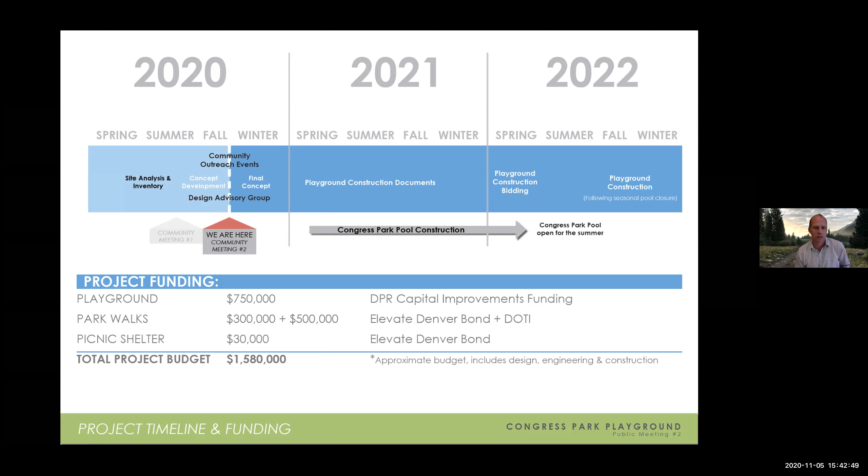In order to get a better idea of who's joining us, we want to see who's been a part of this previously and who's coming in for the first time as far as the project and participation. Clark, can you go ahead and go to the next slide here?

We're going to pop up a poll question just to see, one, to make sure that you're paying attention and ready to participate and keeping you awake here, but also to see who's involved and who's here with us today, so we can gauge how we want to approach the discussion and how much we need to step back versus the new information.

So Christopher Hoy is going to run through the polls here for us. Hi everyone, I'm Christopher Hoy with Flow Design Collaborative. I'll be administrating the polls for you this evening, and we're going to launch this first one.

Really, just trying to get, like Jay mentioned, an idea of who's on the outside here watching this presentation and what your involvement has been thus far. So we're going to go ahead and launch the poll. The poll question is: how involved have you been in the Congress Park Playground project? You can have multiple answers here, so put in all that apply, please.

And we're not holding it against you if this is the first time that you've been here. We're excited to have new people, and hopefully the word is spreading and more people will get involved and be able to provide some feedback.

So while we're waiting for these to come in, I'll reiterate that we're doing the poll questions here just to get some general feedback tonight, but we would appreciate it if you would go to the survey. The survey will open after the meeting, and we'd really appreciate it if you go ahead and take the survey as well. There'll be an opportunity to provide more detailed feedback and information, and that'll really assist us as we proceed after this outreach effort to try to get to a preferred alternative.

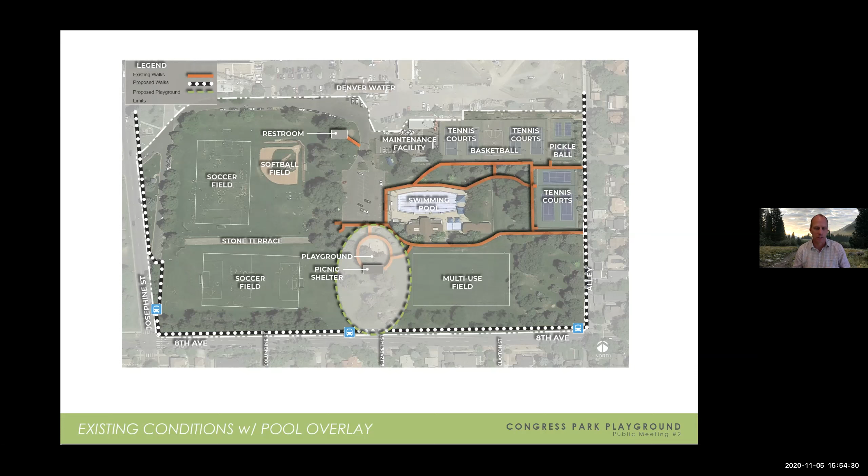So the inspiration for what you're going to see in these different concepts tonight really comes from the feedback that we have received from the community, as well as the history from Congress Park itself. Congress Park at one point in time was a nursery for providing trees for Denver Parks and Recreation, and we thought that was a neat theme to tie into with the history of the park.

That combined with the interest of introducing nature and having a more nature-inspired playground, we've taken on this idea of the trees and the nursery and kind of a nature discovery type of theme. So it's not as literal as maybe a train theme or a rocket theme, but you'll see these elements come through in our concepts.

This idea of a tree house—we don't have the ability to actually develop a tree house in the trees themselves, but we wanted to bring that idea or concept into the themes that we're showing. So you're going to see this inspiration carried throughout all of the different concepts that we go through today.

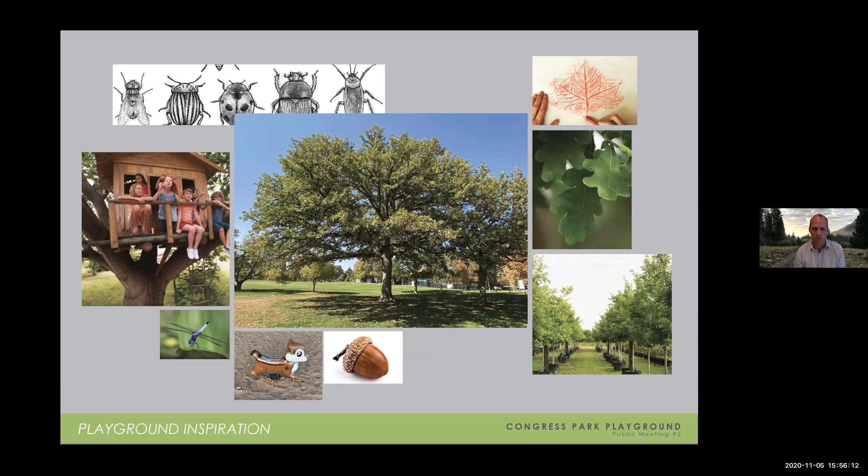So we're going to start high level, and we're going to go through all three concepts. We do have three concepts, referring to those as concepts A, B, and C—no particular order. We want to talk high level first, and the considerations we want you to think about are the locations of the playground, the relationships of the different program elements or equipment within the playground itself, and then the circulation.

How are you getting to the playground? How are you moving in and around the playground? I think one important thing to keep in mind is that there is an existing shade shelter.

That shade shelter is going to remain in place in the location that it's at. So one of the things you'll see is that all of these playgrounds, although they're in a little bit different alignments and locations, are all centered on and surrounding that shade shelter. The intent is that the shade shelter can work both in conjunction with the playground—so if there's an event going on or you wanted to come and have a picnic at the shelter, you can do that and still have a really nice adjacency to the playground.

It is a permittable shelter, so because of that, we also wanted it to be able to work independently or separate from the playground and the play area, with a little bit of separation and buffer. Down the road, there may be a need or desire to actually have a permitted shelter that's a little bit more separated from the playground, so that you wouldn't necessarily feel uncomfortable coming to the playground if there was a reserved event going on. So you'll see that carried throughout—we're trying to create some buffer between the shelter and the play areas, but we're also trying to combine them so that they work cohesively as well.

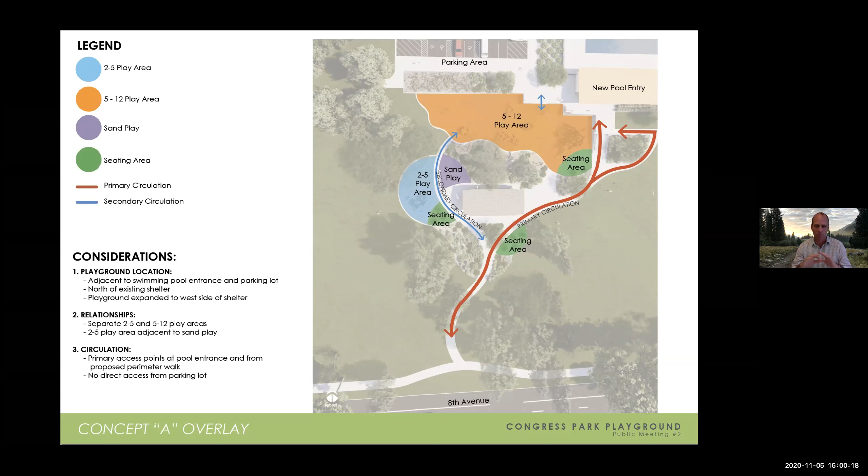So what we're going to do, this is A, keep that in mind. We're going to go to concept B now and look at it at the same level before we really get into the details. In concept B, it's pretty similar, so let me point out some of the major differences.

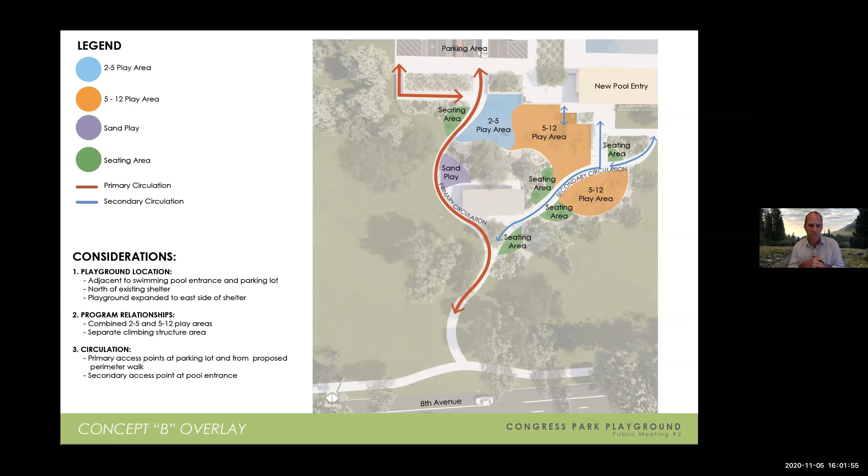The existing playground exists in a place that sees a lot of shade in the wintertime, and that has an impact on the usability of that playground. All of these concepts are going to provide a little bit better solar aspect because we're shifting it out directly from underneath those trees. But we're also trying to find a balance of incorporating spaces within existing tree canopy, as well as proposing new trees around these areas to create that shade.

Shade is a really important part of the playground experience. We want to take advantage of those trees while being cognizant of not impacting them during construction. Part of what we'll be expressing through these concepts is actually introducing more trees to begin to develop a newer tree canopy, as some of these other trees reach the end of their lifespan, and we'll start to have new tree canopy coming in here as well.

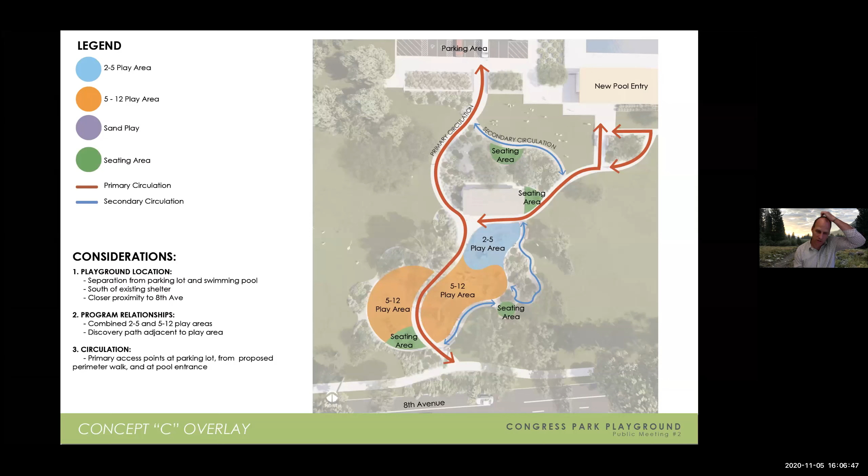So something to consider as you're thinking about concept C. Let's go ahead and go to that next slide, and I'd like to pull up the third poll now. Christopher, I'll let you take it from here.

Yeah, so we have our third poll of the evening, and basically, like Jay said, just strictly looking at location, relationship, and circulation at a high level. Which of the playground layouts would you prefer? It'll be interesting to see.

It may change once we get into the concepts and dive into a little more detail, but there are definitely some important considerations as it relates to how you can get to the playground and move through it. Clearly, this circulation can function not only to access the playground, but also to access the pool and provide some additional connectivity to the neighborhood and community surrounding it.

You'll have more opportunity when you go to the survey to spend a little more time with these.

I know we're moving pretty quickly tonight. We have a lot of information we want to get out there. When you go to the survey, you'll be able to take your time to evaluate it in more detail and get a better sense for what makes sense. Or the next time you're out at the park, go visit before you take the survey and think about what that feels like and where you think this might want to sit.

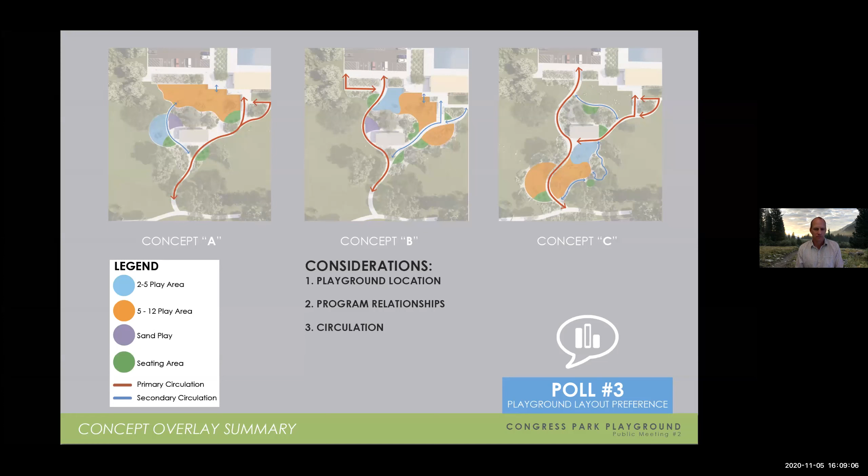Now we're really going to dig into the details, so there's going to be a lot to take a look at here. We're going to dive into concept A. Now we've cleared that high-level overlay, and we're looking at a plan view of concept A.

We've got the playground between the shelter and the new pool entry, with the 2 to 5 play structure on the west side. Keep in mind we've got a buffer between the parking lot. Our main access is down along the pool entry, and adjacent to that is the main 5 to 12 play structure you can see sitting in there.

You also have an opportunity up in this location to access the playground directly off the level of the entry. There's about 4 feet of elevation change from people walking on the sidewalk going into the pool and the surface of the playground down below. So the pool entrance is higher, and the playground is lower.

This actually gives us a pretty neat opportunity to do some sloped playground elements. In this case, you can come right into the playground onto a higher level and have a surfacing that slopes down into the playground, which allows us to do an on-grade slide. You'll see a slide coming off that entrance location — the secondary entrance we showed in the previous slide.

We've got the main 2 to 5 play structure over here. I'm going to jump over and show you the real separation of the — I said 2 to 5 up here, I meant 5 to 12 — that real separation down to the 2 to 5.

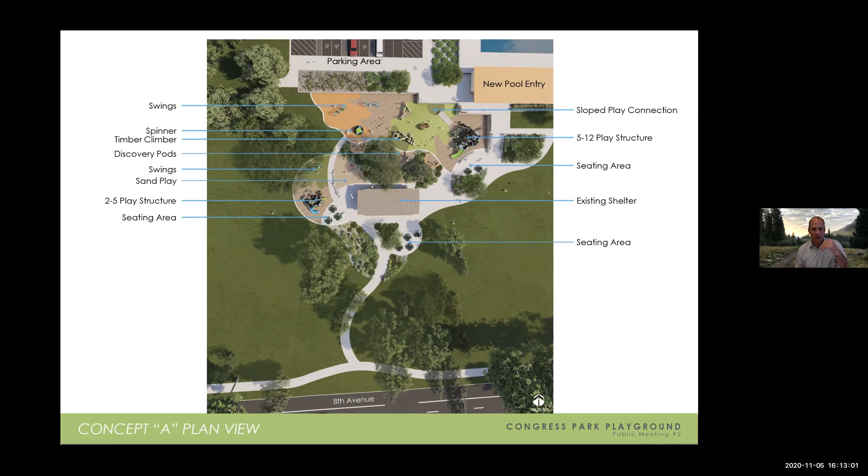That may be more sensory related. So with that, I want to go ahead and jump to our precedent images to show the playground equipment and some of those items here. I'm going to first speak to those discovery elements that I was just referencing.

Within these discovery pods, some of the ideas we're thinking about and proposing is to bring in some elements. Over here on the right, we're showing kind of an embossed panel that could be used both as a sensory element, just for being able to touch. We could incorporate Braille into that as well. And then it can be a place where you could come and do rubbings. We know in the summertime there are summer classes here.

So it'd be great for the kids to be able to bring out crayons and paper and do rubbings on these, incorporating the trees of the park. Here we're showing that bur oak. Maybe we could do a linden, which is living in the playground right now, and really have an opportunity to introduce some of those elements on more of a sensory scale.

This lower right is another one of the discovery pods. We want to bring in this idea of a magnifying glass, so kids can go out and explore, and find different parts of the tree, or find insects, or find stuff that they discover out in the park itself, and bring it back to this magnifying glass. We'd like to maybe do something a little bit bigger, but incorporate it into a place where they can come in and really explore the things that they're finding.

And then a place where there's just some whimsical seating opportunities and elements, a place for kids to come off to the side of the playground and maybe take a break for a minute, moving away from the fast activity and having a little bit more of a passive element. You're going to see those carried throughout all of the different concepts, and that's really just integrating that discovery idea.

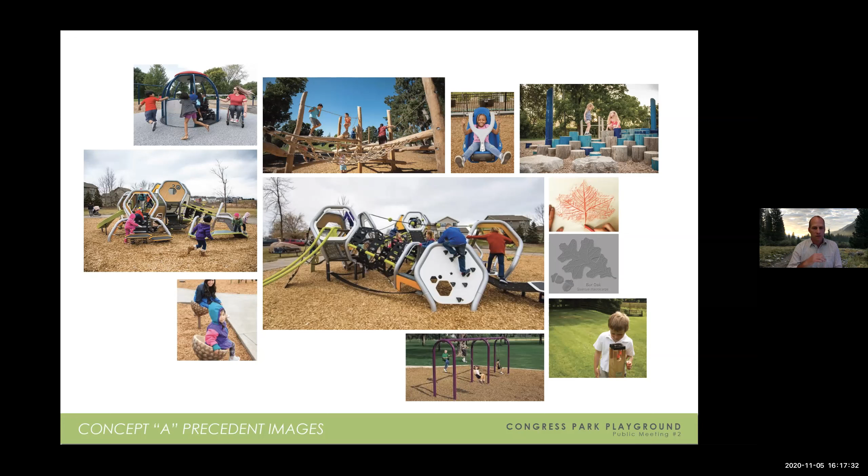So with that, I'm going to keep moving here. We're going to take a look at some renderings to really show what this space might look and feel like. I'll give you just a second to take a look at these, and then I'll walk you through them a little bit.

Up in the upper left, this is an image basically up over the parking lot, looking down into the playground to the south. You can see the shade structure back in the background here. The majority of trees you're seeing here are existing trees that we're going to work to construct the playground around in this scenario.

We are showing some new trees because we'd like to incorporate some additional tree canopy like we mentioned before. The main 5 to 12 play structure is over on the left side of this image, and you can see some whimsical fun elements with acorn climbers placed within this pour-in-place. It's a little tough to see here, but this is a sloped pour-in-place.

This is coming off of the pool entrance on the left, dropping down into the playground area that slopes down into these timber climbers. And then you can see over here we've got the swings backed up to the back of the play area, as well as some of the more accessible elements.

Along the edge, tucked back into that existing tree canopy, is where we're incorporating the discovery pods, just off the playground. So it becomes a nice element of the playground, but is a little bit separated and can be a space to move off from. Over to the right of the shelter is the 2 to 5 play structure.

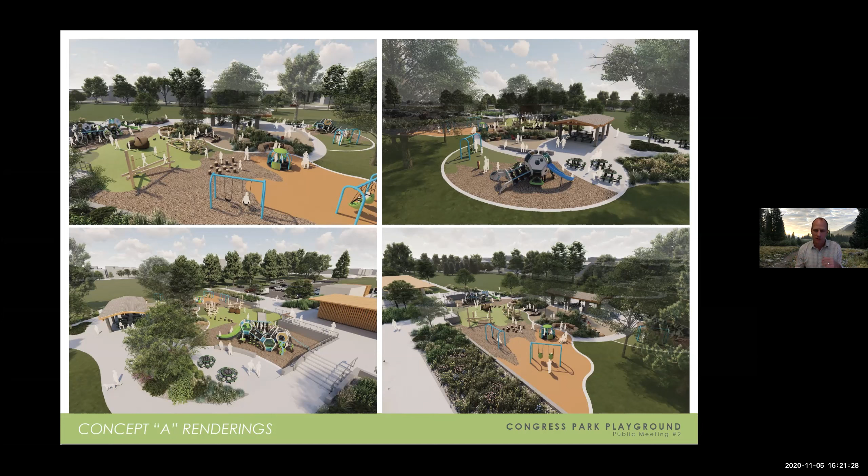A lot of information there. Keep that in mind, we're going to come back to this. I'm going to go through concept B and concept C, and then we'll talk about preferences as we take a look at these. Let's go ahead and jump over to concept B.

Stepping back for a minute, concept B is on the north side of the shelter between the pool entry and the shelter, flipping the additional expanded play space to the east side this time. This one combines the 5 to 12 structure, which is very similar in location to the previous one. The 2 to 5 structure is in the same play pit, but a little bit separated by some intermediate play structures, so it lives on the left side of this play area.

Access into this playground area—one of the major differences is that we have access coming directly off the parking lot, with staired access to get down to the level we need for this playground to be relatively flat. But we have an opportunity to potentially bring a ramp down around to access that same walk.

We also have the same access that we had in concept A coming down from the new pool entry area. This incorporates a little bit larger timber climber—a bigger structure that takes its own space out here. We're also doing some buffering from the existing play fields in the turf to the east. A lot of similar elements carry through, with the acorn climbers in the center and the discovery pods in a similar location to concept A. We're also incorporating seating areas throughout the space that can be used with the playground, connecting down to the perimeter walks on the southern side.

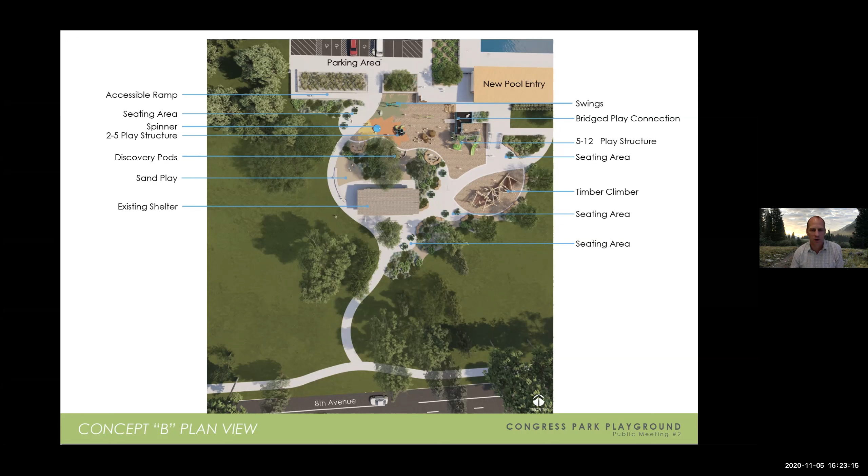So let's go ahead and go to the precedent images and take a look now that we have an idea of what we're looking at here.

The big picture off to the center left is what's being proposed for the larger structure. This starts to take into that idea of the tower, getting up into the canopy and the treehouse, as well as really bringing in the slides. Slides are something we really heard about, and getting these bigger slides into this concept is a little different than concept A, which didn't have quite the same level of height as this structure.

Bottom left is the 2 to 5 structure—a little more similar in nature to what we saw in A, but with a more contemporary feel and some natural materials, contained within that same pit.

There's the bigger timber structure we pointed out, and some similarities with the traditional swings. We're also trying to incorporate a spinner—this one shows a different option or opportunity for a spinner, so I'd love to hear if you have preferences on types of spinners and which ones might be more exciting or easy to use for kids and groups of kids. There are also a lot of similarities with the discovery pods and discovery nodes in this one, in terms of locations and how those might be incorporated.

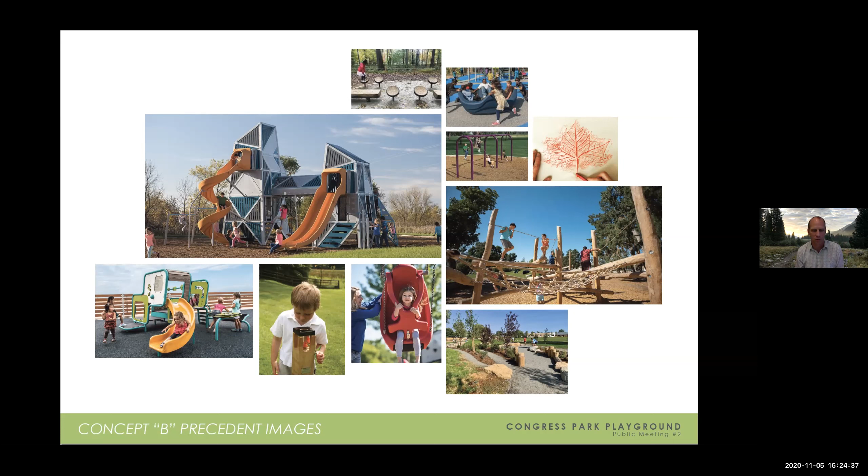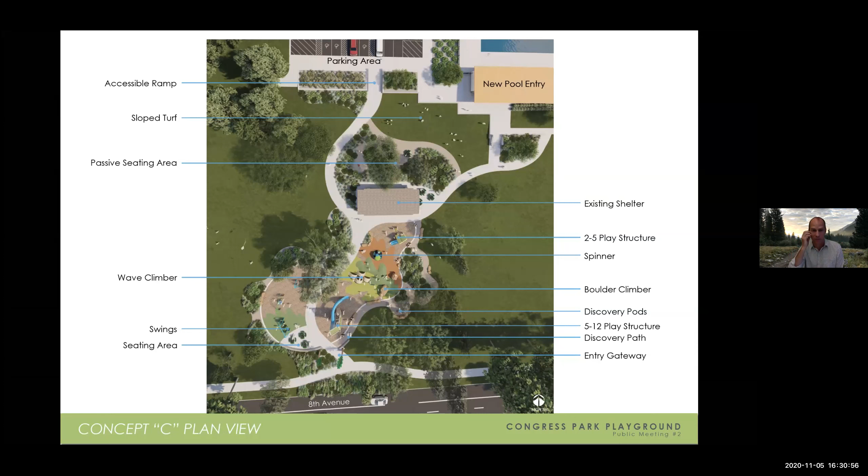So let's go ahead and go to the precedent images there. A little bit different play equipment here—upper left is the 5 to 12 tower. Something similar to this is what we're looking at potentially incorporating into this concept C.

Keeping in mind that if you preferred some of the other concepts, we have some flexibility in terms of what can come in from the play equipment side. This could also be used in concept A or B, bringing in more natural materials, with opportunities for a bridge. We're not showing a bridge in this concept, but if we took this to concept B, that might be something we could do.

Again, tying into that treehouse theme, the 2 to 5 structure is closer to on-grade, but that's the idea and feel of this 2 to 5 play structure.

A little bit different climber structure here—instead of the timber climber, we've got this nice wave structure, using natural materials but with a more contemporary feel. And in place of the acorn climbers, we're showing some boulder climbers. We'd heard from quite a few people that the boulder climbers were appealing.

On the swing side, a bit different is the incorporation of this group swing, which we're not showing in the other concepts. That may be something we could incorporate into those if we get a lot of feedback that it's really desirable, but this is the only one that shows it at this time. So again, carrying that same theme of discovery elements into this discovery walk that moves around the playground and in and out of the existing tree canopy.

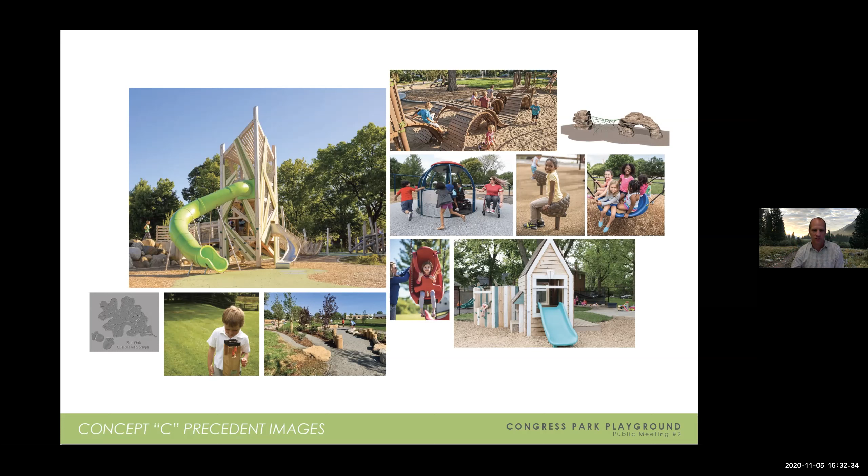So let's take a look at those renderings of concept C.

The upper left image is just off of the shade shelter, up closer to the pool, looking down toward 8th Avenue in the background. This is the 2 to 5 play area in the foreground with connections into the discovery walk, and one of the discovery nodes showing up in the front portion of this playground.

You can see some neat terrain and slope into the poured-in-place surfacing at the center, providing interest and tying these play structures and climbing structures into a bit of differentiation in that surfacing. And then obviously the 5 to 12 tower back in the background, with the swings off in the back there.

The upper right is looking back from the other direction, over those western play fields. We've got the swing pit in the foreground and this 5 to 12 play structure—you can see a bit of this gateway now peeking through from the perimeter walk. We've got this entrance gateway coming off the south, providing a nice interface with 8th Avenue as people are driving by, with this whimsical little gateway coming into the playground, giving nice visibility from the community on that south side.

This lower left is up above the pool, so this camera's really high above the pool looking down. We've got the shade shelter in the middle. You start to see this passive area with some additional seating on the north side of the shelter, really incorporated into that tree canopy. Nice little space in there with this sloped turf area in the foreground, and then the play area back in the back. You have an opportunity to access up from the parking lot down to the shade structure and the playground, as well as up to the pool entry.

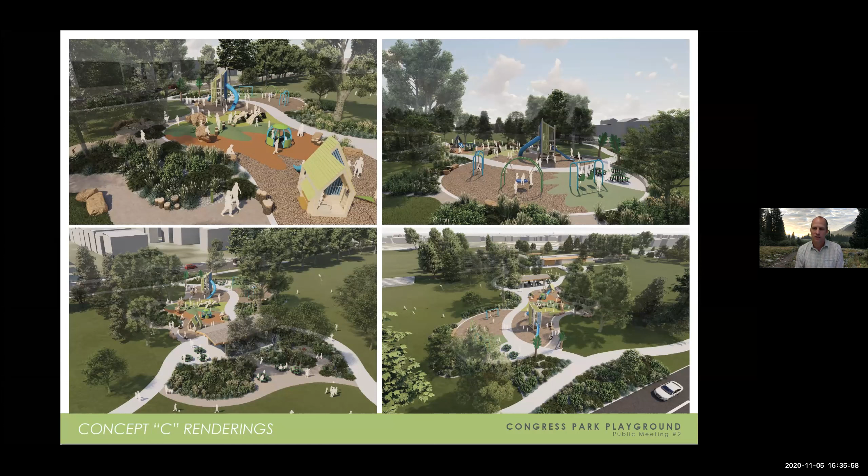All right, so a lot of information there. I do want to leave some time to be able to talk through these. So we're going to go on to our next poll question. Now that we've really had an opportunity to dive into detail concepts A, B, and C, we'll show those here and let you go ahead and take a poll.

So which detailed playground concept do you prefer now that you've seen the 3 concepts in a little more detail?

It's tough. There's a lot of information there, and we recognize that. That's why we think it's really important that, following the presentation tonight, you let this sink in a little bit, spend some time tomorrow going in and taking a look at that, or over the weekend. We'll try to leave this poll open, I think, for probably a minimum of 2 weeks.

So plenty of time to get in there and take that survey, really dive into these concepts. I think the team did a really nice job of pulling together 3 really different concepts. We think it's probably pretty challenging to figure out which one might be a preferred concept. There are certainly some differences between them that may make one appealing for one reason and another for another reason. So a lot to think about and explore here. Please take your time to go in and take that survey over the course of the next week or so, and provide your feedback that way.

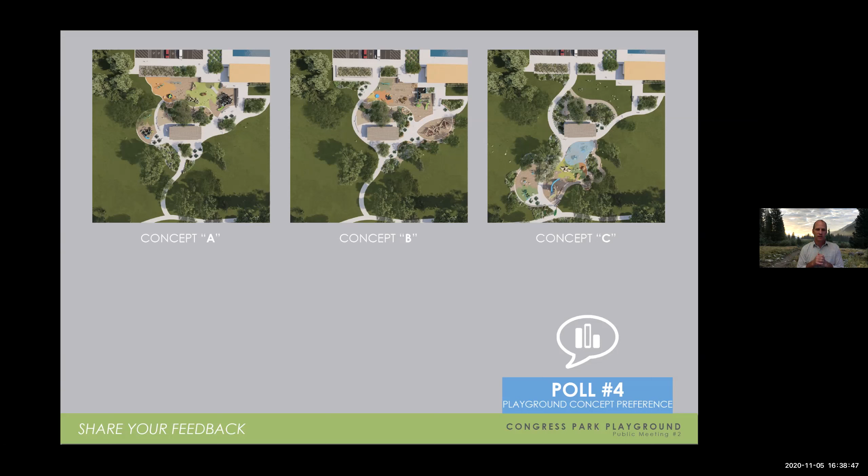So that was a lot of information. I hope I didn't miss any major points there. Thinking back to those goals we presented early on, both the department's goals initially and what we were hearing from the initial community feedback, whether or not we're really achieving those—I hope that we are. I think we've captured the majority of that in these concepts. The intent now is to take your feedback from this survey and really develop a final concept that we've all talked about as probably concept D, right?

It's a little bit different, so we'll wait and get some feedback from you guys. We're going to be reaching out to the department and operations and having the same presentation and conversation with them, because there's definitely some considerations with how operations can access and maintain these areas.

So we'll be working on developing that final concept to have something complete before the end of the year, and we'll have some sort of presentation for that. We don't know what the format will be yet, but that'll get communicated out to the public once we've compiled all the feedback from this second round of survey questions. We'll be working on that through the rest of the winter, wrapping up toward the end of the year, and then moving into developing the construction documents.

And like Chris said, we'll complete the construction documents, then there'll be a bit of a pause before construction so the pool construction can finish. The pool can open up, and once it closes for the season, we'll move to the playground construction. That way contractors aren't stepping on each other's toes, and the park isn't in full construction mode when the pool wants to open for that inaugural reopening. So that's really the next steps following this meeting tonight.